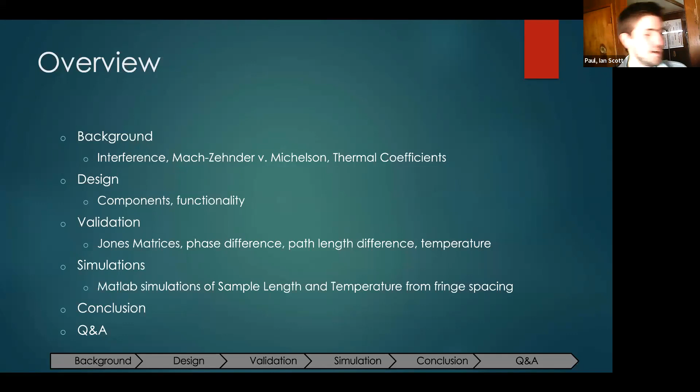And then I'm going to just briefly show the results of my simulation. I didn't have as much time as I wanted to make those fully in depth. I was honestly pretty satisfied by the validation, given the scope of this project. And then I'll give you my conclusions and answer the couple of questions I've gotten.

Okay, so interference. It may surprise you to learn electromagnetic waves can interfere with one another, right? When they're in the same chunk of space and time, their electrical potentials combine together. This can be either constructive, where the two waves' peaks align and they get big, or it can be destructive, or just kind of flatlines. So here you see two waves of pretty much the same exact wavelength, traveling opposite directions of each other, and the red wave there is the resultant interference. So waves just combine, essentially.

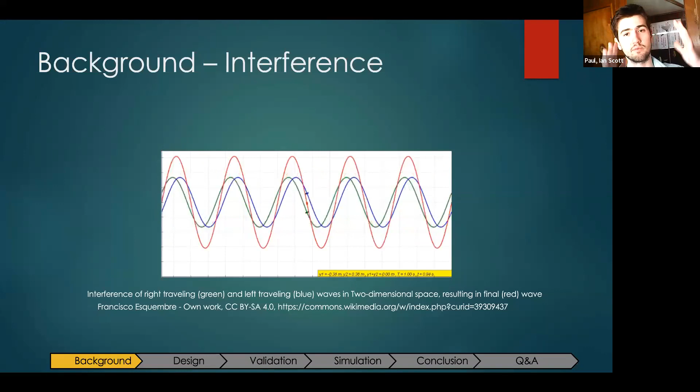It's a simplified version. So here you're witnessing this happen over time. However, it can also be a spatial difference. We'll be using a laser source, which has a very narrow band of frequencies in the light that it emits. So because you have just a very little deviation on that wavelength, they won't really be changing due to that. They'll essentially be harmonized. And then whatever phase difference we introduce because of the difference in lengths of the legs of our interferometer will actually show not across time, but across space. So in optics, we usually see that as an interference pattern.

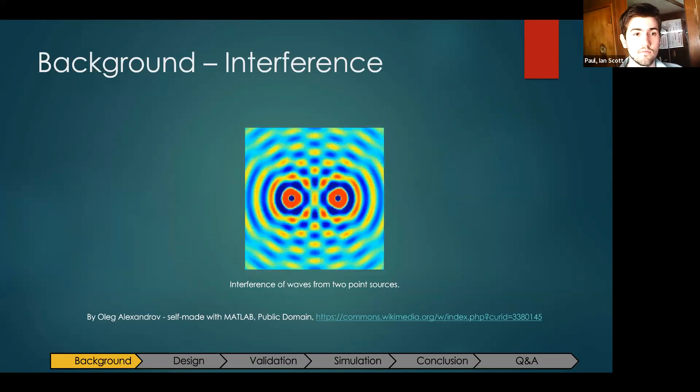So we'll be seeing little fringes, and we'll be counting those fringes. In this project, I'll end up using a camera, but you could also use a photodetector. So an interferometer. Here we have a Michelson interferometer and a Mach-Zehnder interferometer.

So the Michelson interferometer, it works by sending in a point source. It goes and hits a beam splitter, typically a 50-50 beam splitter. So half the energy goes one direction, half goes the other direction. And they both go and they hit a mirror, right? M1, the top mirror here, is usually at a fixed length. It's not going to move, right?

And then, so let's talk about that light. Half the light goes there, it hits mirror one, it comes back, and it goes straight through the beam splitter, right? And it hits the screen. The light that passed through the beam splitter, wave two, it goes and it hits mirror two. And mirror two is a little bit more special.

Depending on the type of your interferometer, the mirror might change its angle. It might move forward and back, typically by microns, tiny adjustments. They're actually really high precision machines usually. It's the type of interferometer that LIGO is.

And then you have a Mach-Zehnder interferometer, which is what I'll be using here. They're typically used more for temperature sensors. And from my understanding, the light comes in, it hits the beam splitter, hits those two mirrors like you see, hits another beam splitter to recombine. But the phase difference, instead of being introduced by moving mirror two, you put some sort of a change in the index of refraction, like a different material.

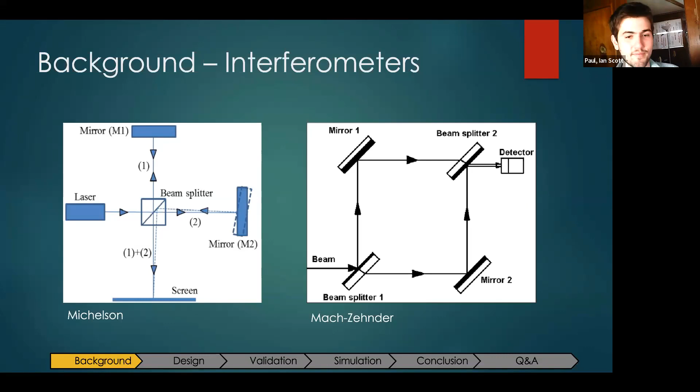So what we'll be getting out of this interferometer when we get a difference, because of that glass, it's going to introduce some difference in phase in these two waves, right? They were perfectly aligned, perfectly in phase waves, pretty much the same wavelength when they left the laser source. And then they're going to have a phase difference introduced. So the waves will be slightly out of phase, but not fully constructive or destructive. And that's going to produce an interference pattern.

It means that it's going to literally get bigger. The light will travel less distance before it hits the glass, because the glass got slightly longer, right? So less of its path will be through air and more of it will be through the glass, which is good because that introduces a change in the overall optical length of that leg, which is giving us that phase difference, right? Good. However, when you heat up glass, it also lowers its density.

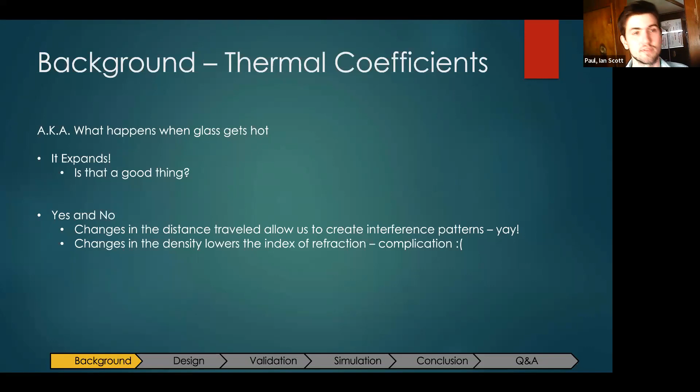And as I'll talk about in a minute, that can introduce some aberrations and throw off some of our optical system. So not all glass is created equal. There are a lot of types. The chemistry behind optical glass is beautiful and ridiculous. Tiny changes, tiny imperfections, impurities make drastic changes. This is from Jamieson, 1981, and really I'm just pulling it here to show you that there are a lot of different types of glass out there.

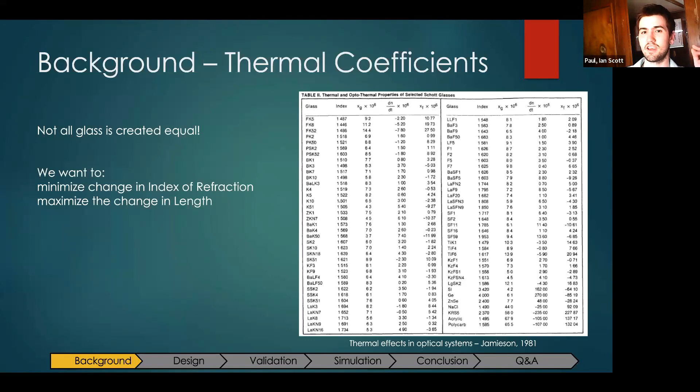So what we're looking for is some sort of glass that I can essentially minimize the change in index of refraction while maximizing the change in length. And really what I mean by that is I'm not trying to introduce any aberrations. So I want a glass that is going to have a wider ranging effect, right? I want it to grow slowly to measure a larger range of temperature, which was kind of part of the scope of my project. Instead, a lot of very precise Mach-Zehnder interferometers are built that have a much narrower range.

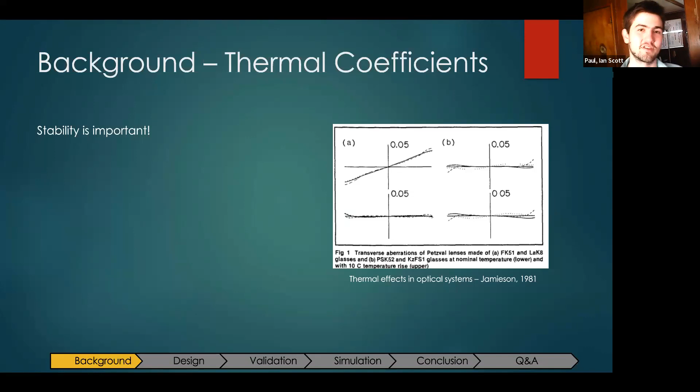However, you can get incredibly precise with those materials because they grow more, but you're going to bring your system out of focus faster. So it's kind of a choice of precision there. Okay, my design, let's get to it.

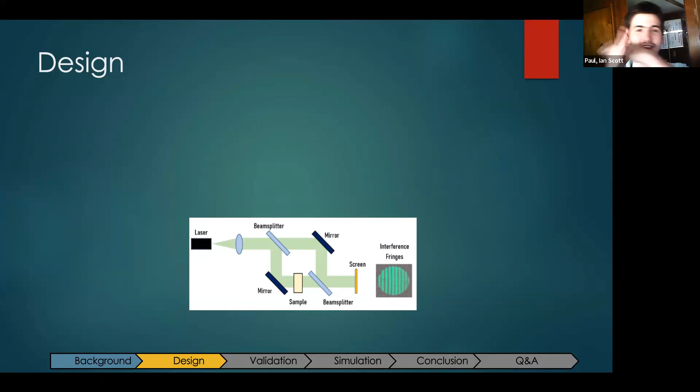And then the lower mirror, its path has that sample there. So the light's going to come in, get deflected from the beam splitter, hit the mirror, perfectly reflected. It's going to go through that sample, which is going to introduce a phase difference. It's going to come back into the beam splitter. It's going to be recombined, and we'll see the interference pattern on a screen.

So we actually have to build this. This is just a Mach-Zehnder interferometer, right? And then we're going to place a sample of the material. I chose borosilicate glass. You might know it as Pyrex. It is most likely the glass of your favorite glassware in the kitchen. It can, as you know, take a pretty good amount of heat as long as it's given to it evenly, because it doesn't expand that much. However, it does expand by a very tiny amount, and enough for me to detect with a laser.

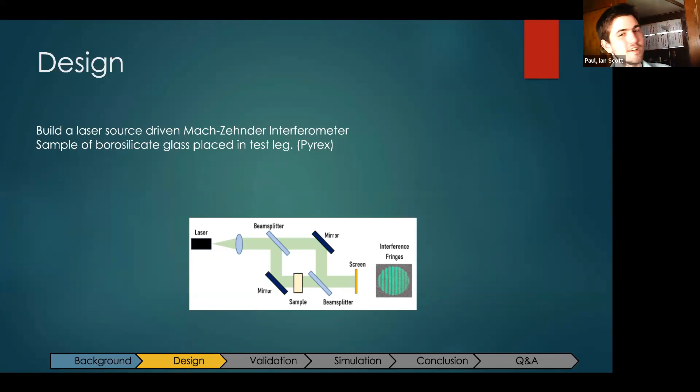So then when we heat it up, it's going to get a little bit longer, and because the light is traveling through that longer than it was traveling through the air after it's heated, the interference pattern is going to change. And that shift in the interference pattern is what we'll be able to mathematically come back to the temperature with.

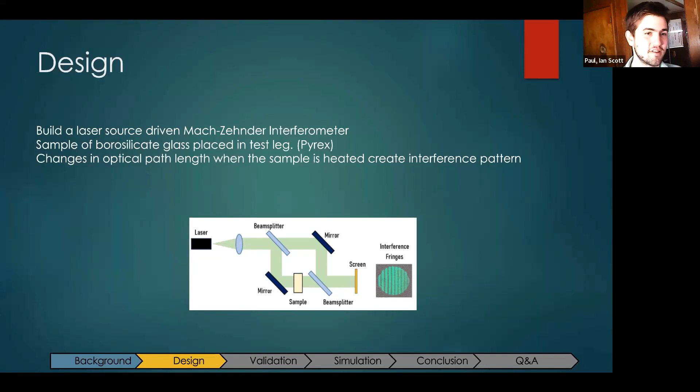So we're going to actually measure it with a CCD camera. And then, sorry.

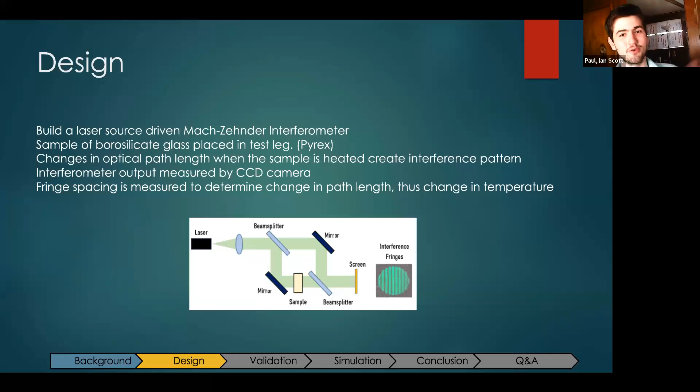Oh my gosh. Sorry, so we're going to measure that with a CCD camera. And then the spacings between the fringes and the fringe width is actually what I'll show you we use to regenerate the temperature. So for data collection, we're going to use an Orca 2. It's a nice little digital CCD camera, and I'm actually using this to kind of work backwards for a lot of the specifications, like the wavelengths I'll be targeting, what source I'll be using.

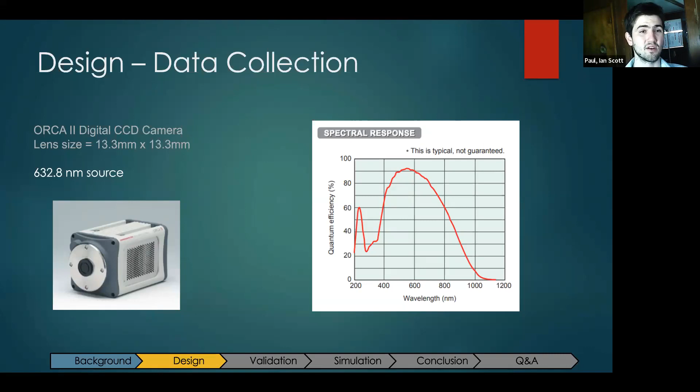So I ended up using a laser that has a 632 nanometer wavelength. So you can see just over from 600. It's pretty much right in the peak of what this camera detects. So that's good for me. And then I'll be using a laser with a 1 millimeter spot size and a 10 times beam expander to bring that out and focus it into the camera.

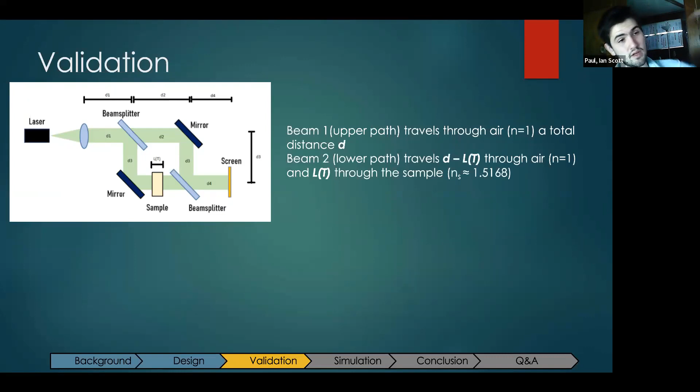Okay, let's get into the math, the fun part, totally. So beam 1, right? It comes in and it's going to travel an overall distance of D. That's D1 plus D2 plus D3 plus D4, right? And it travels that through air, which has an index of refraction of what I'm going to call 1, right? Beam 2, though, it goes through D1, D3, and then it goes partway through D2 until it gets to that glass, which again, like I've said, its length is a function of temperature. So we're calling that L of T.

And then it goes out the glass the rest of the way through its D2 and through the beam splitter out to D4, right? So it travels a distance of D, but travels D minus L of T through the air with the index of refraction of 1. And it travels that L of T, T being temperature, through the sample, which, borosilicate glass, has an index of refraction of about 1.5168.

Okay, so that gives us a total difference in the optical length that comes out to be equal to the length of that sample times the index of refraction minus 1. So from that, we can calculate the difference in phase. The difference in phase is a function of that changing optical path length, OPL, and is our good old friend K times the change in path length, K being equal to 2 pi over lambda, and then L of T, that change in length as a function of temperature, times n minus 1, n being the index of refraction.

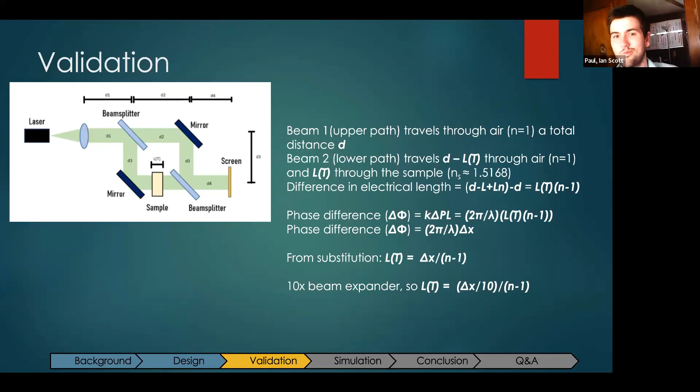And then the phase difference introduced from the fringe spacing comes out to be just k delta x. Once again, pretty much the same thing, but there the fringe spacing is on the screen. So from substitution, we can get back delta x over n minus 1 as a function of L of t. And then we're actually going to be using a 10 times beam expander, so we need to take that into account too, because it'll obviously widen the fringe spaces by a factor of 10.

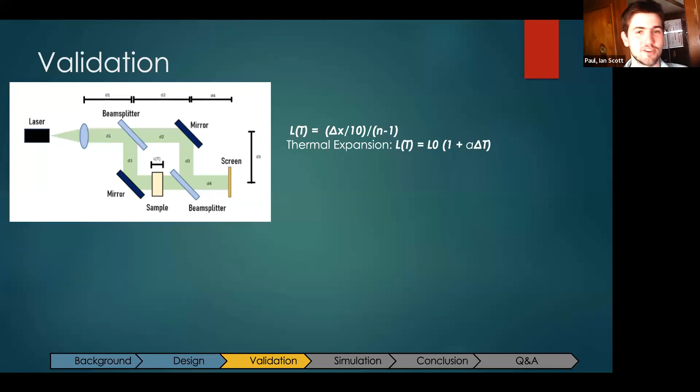So we take our equation for L of t, and then we also have a different equation for L of t, right? We have it up there as a function of fringe spacing, but now we have it as a function of thermal expansion. So L0 is the initial length. I'm going to end up using 15 millimeters. And then alpha is a coefficient that's based off the material. It's just a thermal expansion coefficient. Then delta T is temperature.

So from a 15 millimeter sample at room temperature, you have 20 centigrade; room temperature is 293.15 Kelvin. Alpha for this material is 3.3 times 10 to the negative 6 inverse Kelvin. So that brings us this as an expression for the length of the material. And then we can solve that for the temperature as an expression of that length.

And then, since we know that length is a function of that fringe spacing, we can go through and substitute that in and get temperature as a function of fringe spacing. So now we just need to see how big the fringe spaces are. We should be able to work backwards.

So let's quickly talk about the Jones matrices. Yay! So Jones matrices and ABCD matrices are actually really cool. They let you skip a lot of complex math by essentially analyzing a phasor version of your system by doing matrix math. So these are some of the identities we'll end up using. They're nice and fun, little matrices. And then something that's important is that with Jones matrices, you actually work backwards.

So we're going to be starting with, let's see, do I have a pointer? Heck yeah. So starting over here, right? Leaving the screen, the thing that just happened is we just propagated that distance d4. Both waves did that, but we're going to look at the upper path for now. So it just went that distance d4. So that's our first matrix. And then it goes through a beam splitter, so that gives us our 1 over root 2, 1, negative 1, 1, 1. And then it goes that distance d3, so that gives us 1, d3, 0, 1.

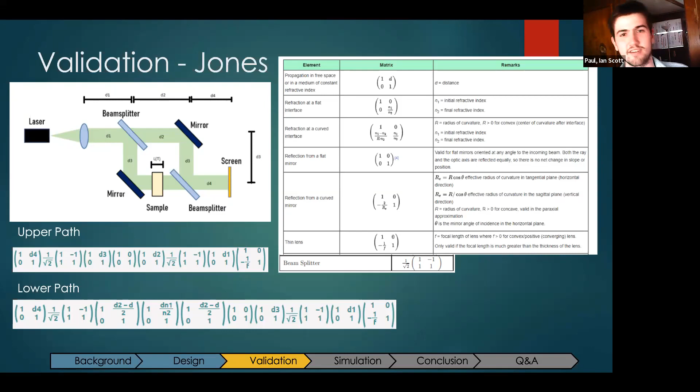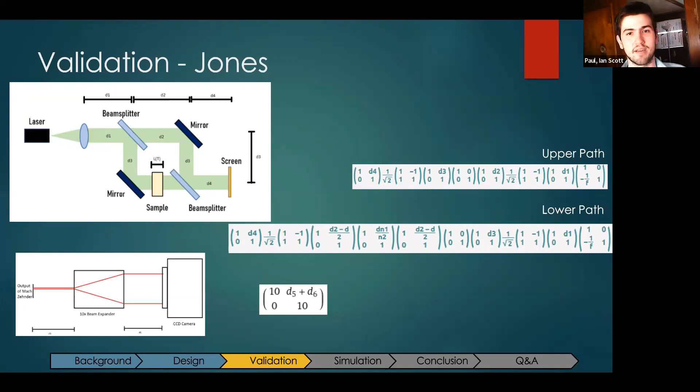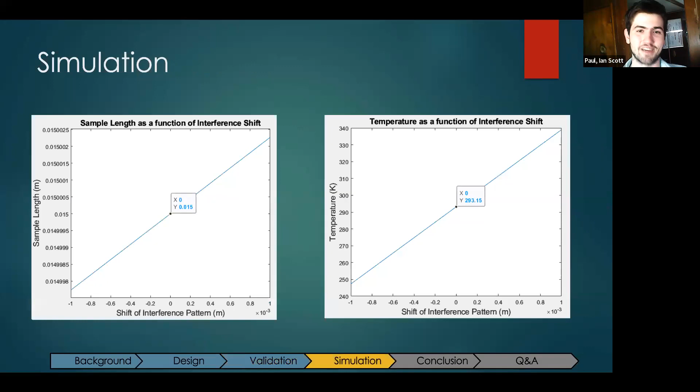So in conclusion, that's the design for a Mach-Zehnder interferometer being used as a temperature sensor. Just kind of an overview of it. It's a mathematically validated system. It should work. Verified that it works by doing a little bit of MATLAB.

And the temperature range, if you were to ideally thermally isolate that borosilicate, that Pyrex, and it wasn't touching anything else. That's a big thing the Jameson paper focuses on, lenses getting too big, cracking stuff. So if you can fully isolate that sample of borosilicate, it should be functional from 190 degrees centigrade to 400 degrees centigrade. And the overall resolution could potentially be improved by using photodetectors instead of a camera, since you reach a limit with the resolution of the camera.